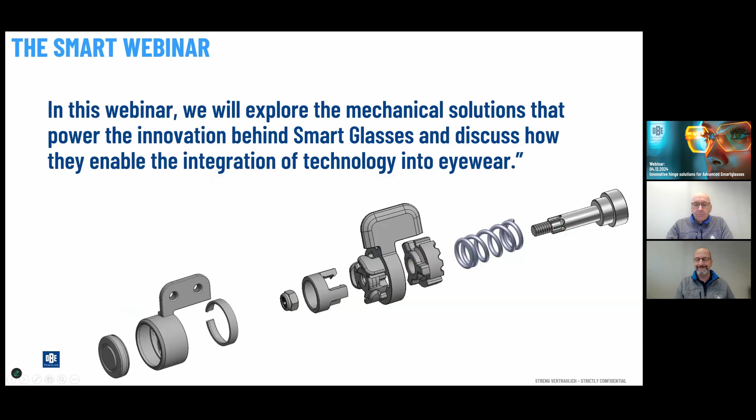So our company was founded in 1904, and we specialized in the optical industry starting in the 1970s. We have been highly innovative, having 200 patents worldwide, and each year we produce about 500 million parts. We have production sites in Germany, where our headquarters is located, as well as in China. This year we acquired a majority stake in an Italian company specialized in luxury frames. By 2025, we will begin operating a new facility in Vietnam. Each year, we equip about 100 million frames with our products and hinges. Since 1996, we have been certified under ISO 9001 and the environmental standard ISO 14001. Additionally, since 2013, we have been active in the smart glass market, offering advanced high-quality solutions.

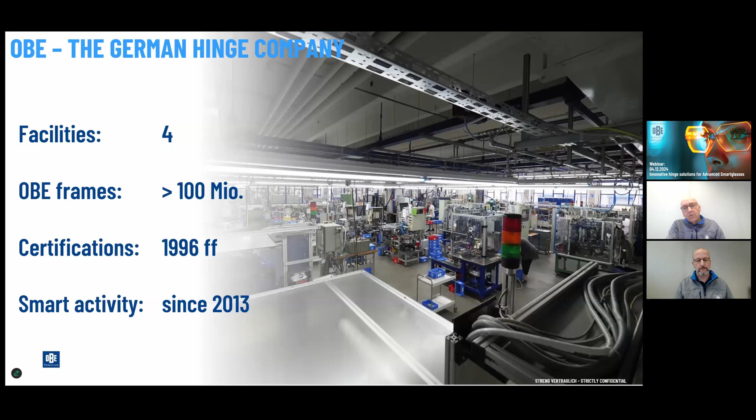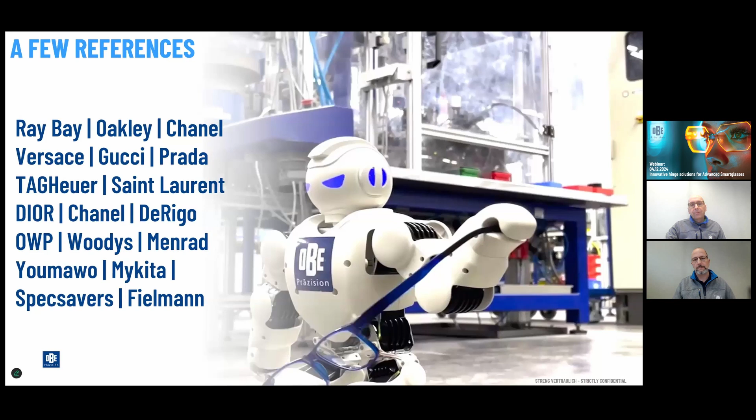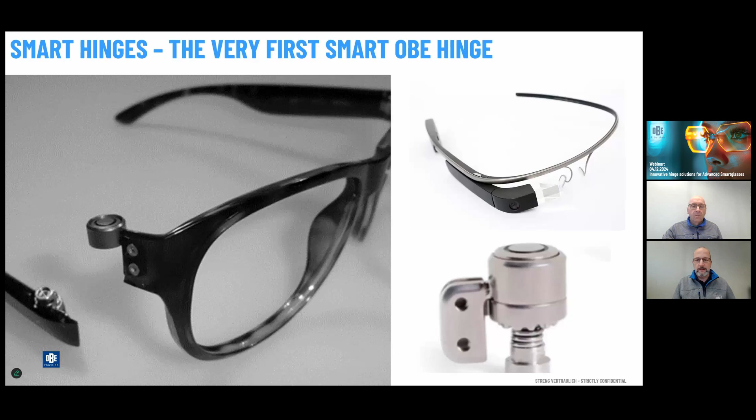This already showed that the smart glasses tend to come more and more to look like standard glasses. Sorry.

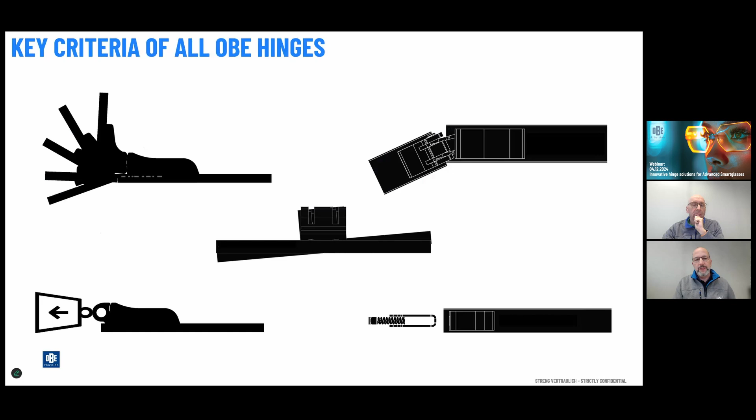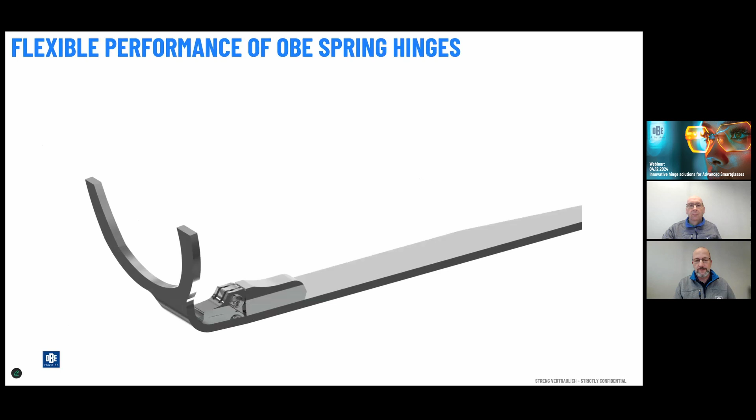OBE's quality is guaranteed by several tests, like cycling test, inclination test, pull-out force testing, and all of these tests, of course, have to be transferred to the smart segment as well. As you can see here, the standard spring hinge movement with 2 stable positions for wearing and storing, as well as the overextension, need to be guaranteed by the QC.

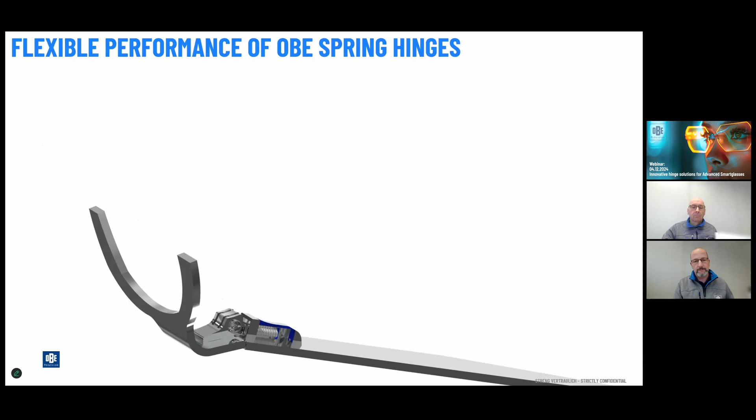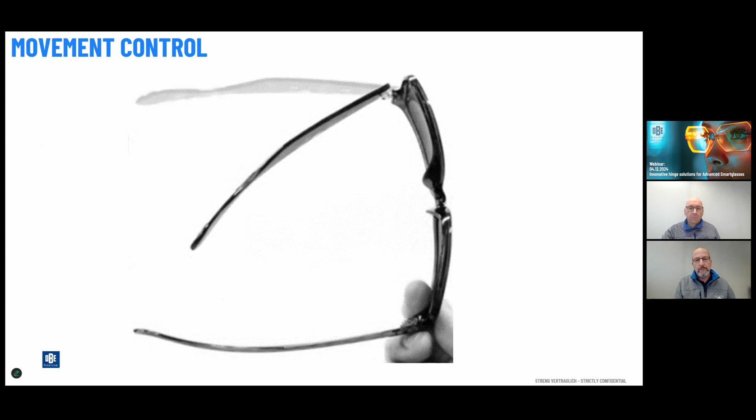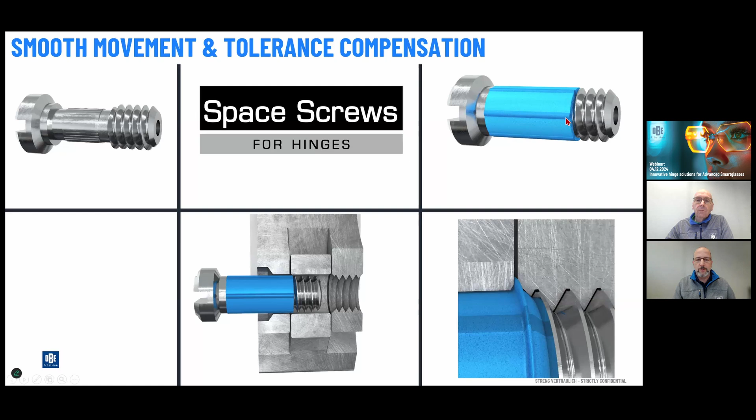If it comes to not having a flex function, but regular hinges, we also have movement control by the use of plastic-coated screws, like these patented space screws, having an overmolding over the screw shaft by plastic, and in addition, 6 small ribs to compensate the tolerances between the hinge lug and the screw shaft.

From niche gadgets to everyday essentials, Frank highlighted our basic criteria for hinges, noting our reputation for spring hinges and precise movement control enabled by our space screws. Building on these fundamentals, I'd like to explore the key factors of smart hinges as they are becoming increasingly more common in our daily lives.

Comfort. The hinges in smart glasses play a crucial role in ensuring overall comfort. They must be flexible enough to minimize the pressure on the wearer's head while simultaneously providing a secure, stable fit. Of course, the weight of the hinge also affects comfort. Lighter hinges can help reduce the overall weight of the frame.

Durability. The second key factor for smart hinges is durability. It is essential that the construction of the hinges matches the frame in order to ensure a long lifespan. In cases of breakages, an exchangeable system helps to replace only the mechanical part, saving the total frame. We believe also that adjustability of the temples to fit the specific wearer will become increasingly important in the smart market. To enable this adjustment, the hinge must be stable to prevent breakage. Additionally, the frame and hinges should be designed for effortless use without being overly rigid.

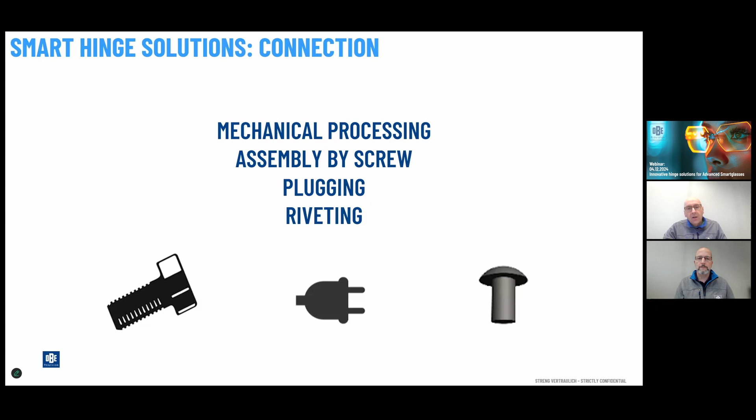Finally, let's turn to our smart solutions, which we differentiate into two categories. The first category mainly involves solutions for the temple, where the electronic device is located on the temple and does not transfer information to the front. For this type of smart eyewear, we offer several solutions.

The second category includes hinges or solutions for smart glasses with a cable feed-through system, where signals, information, or data are transferred from the temple to the front and to the other temple. In this case, the hinge requirements are different, and we also provide tailor-made solutions for these needs.

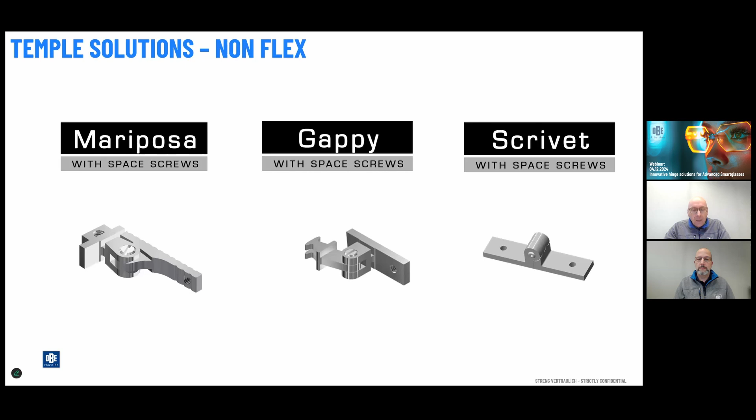Let's come to the first category, pure temple solutions. This picture illustrates the first category of pure temple solutions with no signals to the front. Among our portfolio, we have selected three different hinges with a mechanical connection and non-flexible functioning. These hinges are equipped with a smooth movement system, a space screw system, and are connected using screws and rivets. All of them are made of high quality materials, nickel plated, and come fully assembled as shown.

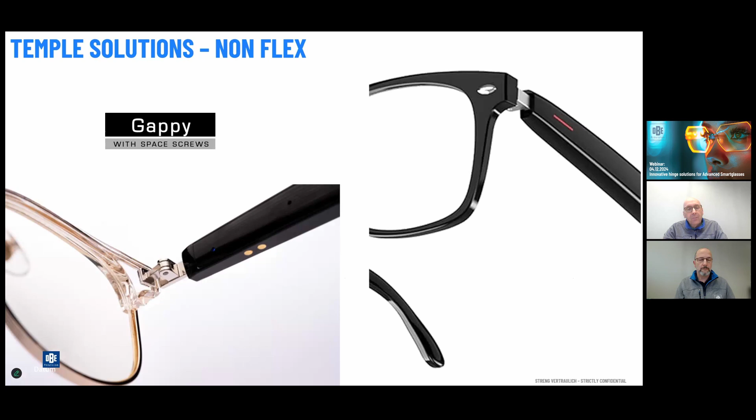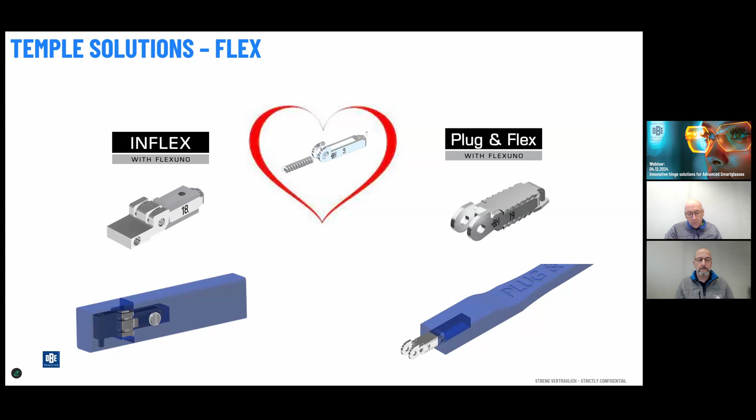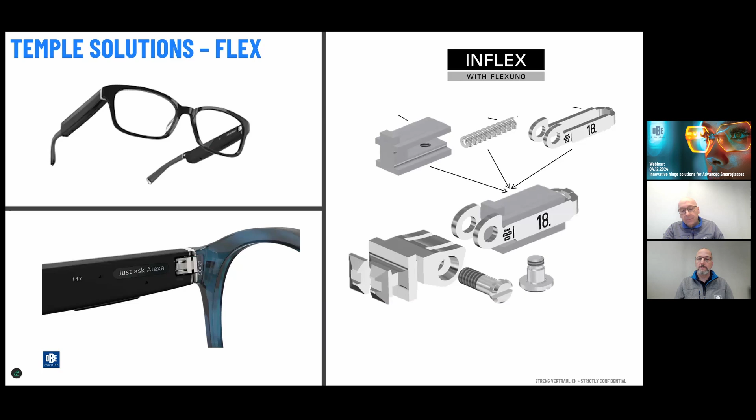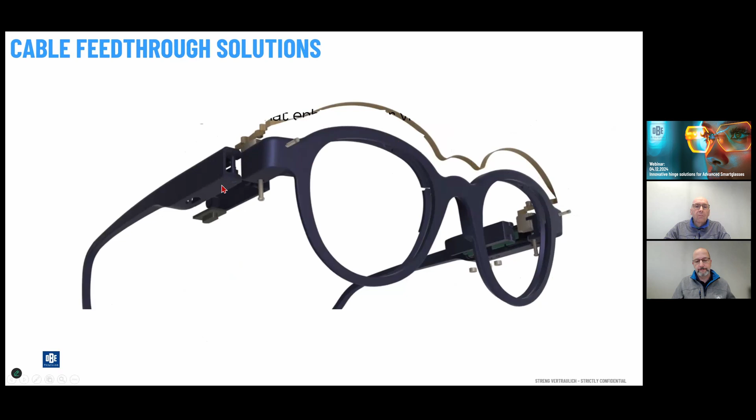But when it comes to data being transferred from the front to the temple, or vice versa, the FPC or the cable has to run through the complete front and especially through the hinge area. This might end up in a problem that the FPC is stressed by several bending operations, which leads to a challenging new topic: to dimension the cable and the cable way perfectly. Either the cable is too long in the open position, so it will be pinched between front and temple, or the cable might be too short, which leads to stress or even a tear when the temple is closed.

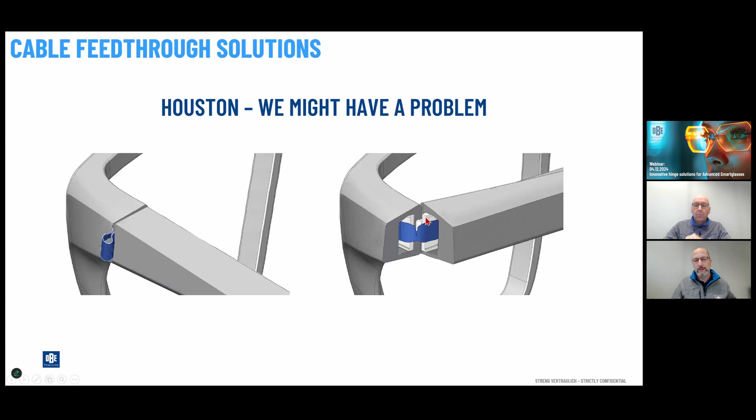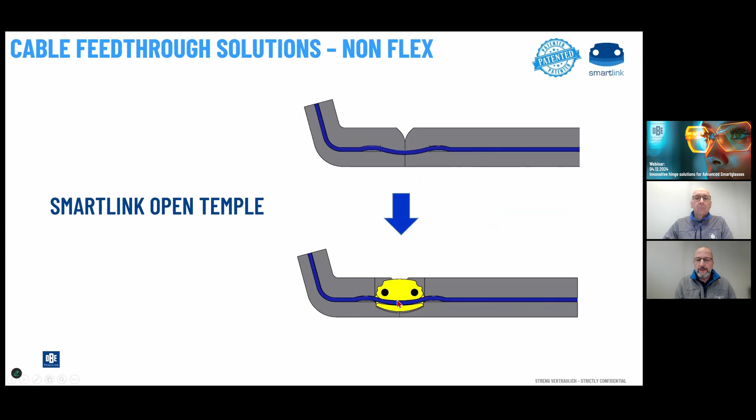For this new task, we provide two different products, one with non-flex operation and one with spring loading, the SmartLink and the SmartFlex. Starting with the SmartLink, the cable is allocated in its track thanks to the slit in the hinge. And the curved construction of this slit prevents the cable from any tangle. Instead of bending the cable in the hinge 90 degrees at once, as usual, thanks to this twice 45-degree bending solution, the cable is not stressed when the temple is folded. The cable is perfectly guided and protected from any accidental contact.

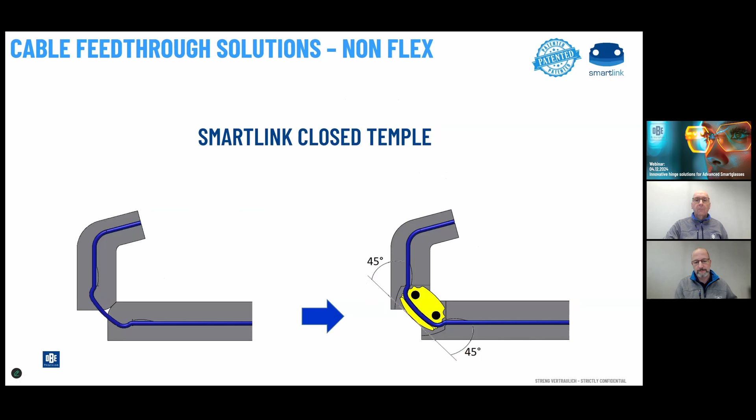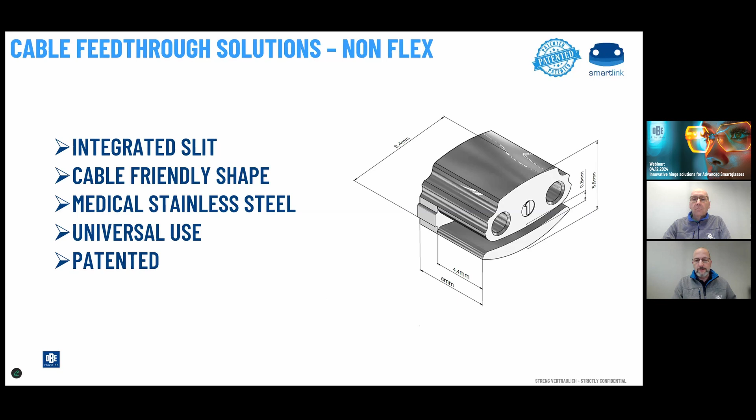So the Smart Link provides an integrated slit suitable for cables up to 4.4 millimeters in width, or FPCs, of course, with the cable-friendly shape. The material is stainless steel, and it's constructed for universal use. And of course, we have a patent on this construction. Another important feature is that due to the open design slit, the FPC or the cable can be easily assembled and disassembled in case of electronic malfunction.

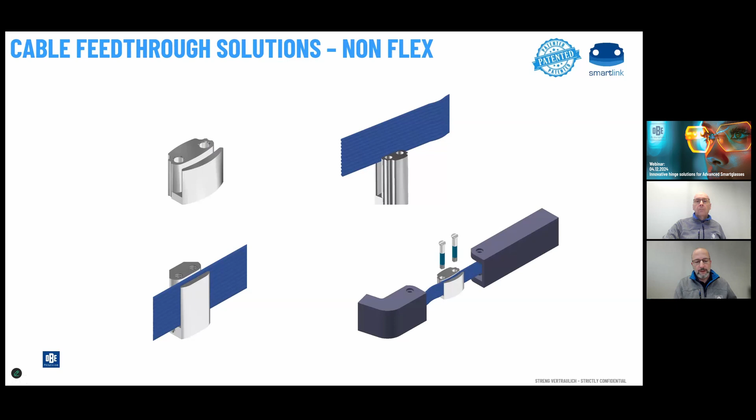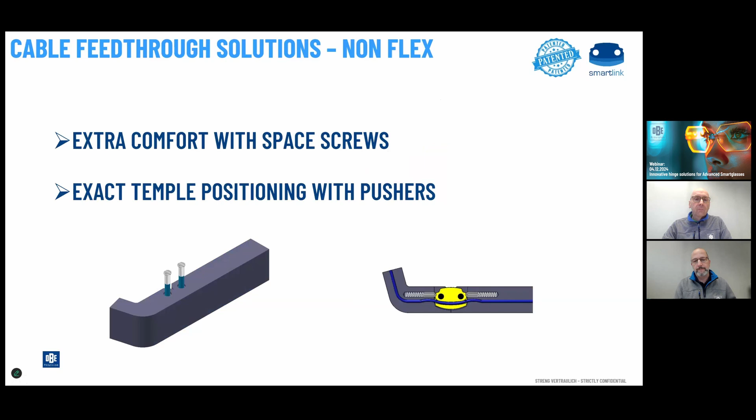In combination with the OBE space screws, the Smart Link provides perfect comfort with a smooth movement. And in addition, with the two spring-loaded pushers, you have a stable opening and storing position. So the Smart Link is a perfect universal solution with cable guidance for less cable stress. It's constructed for easy handling, and it guarantees a smooth movement.

One of our bigger customers, Morrow Eyewear, is using this product. You can see in the pictures the FPC, the cable or the data shown in green, is led through the complete front and through the Smart Link, ending up in the temple where the electronics are located.

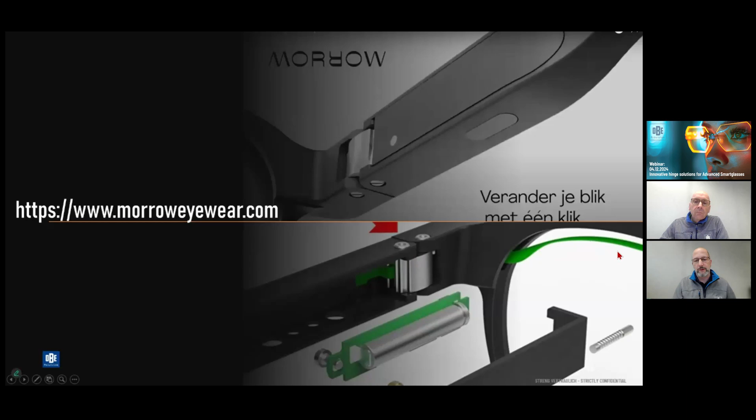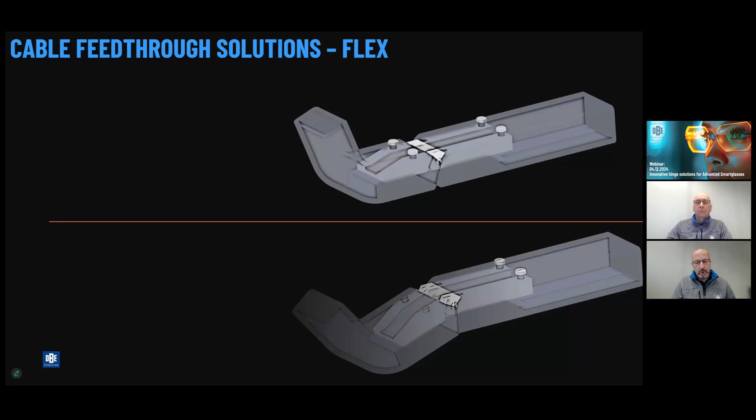If your frame is more rigid, or you want to provide extra comfort, you might consider using the Smart Flex, adding an overbending function compared to the SmartLink, as you can see here. The Smart Flex consists of more components than the SmartLink, of course. We have a housing in the front hinge and two spring-loaded pistons providing stable closing and wearing positions plus the overextension function.

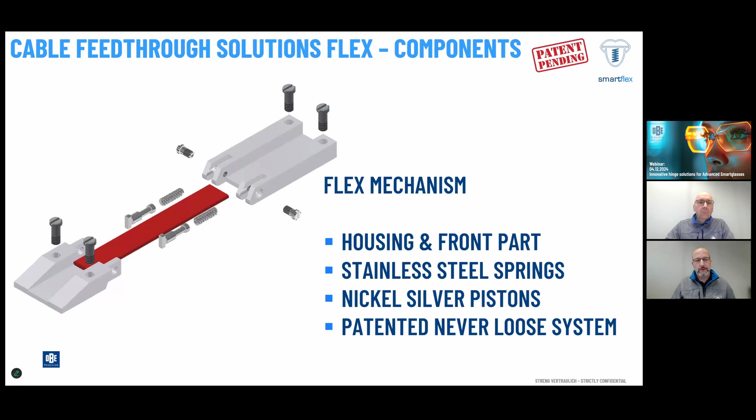Due to this additional spring function, the product, of course, has to be bigger than the SmartLink. Considering the same FPC size of 4.4 millimeters in width, we end up at a total width of 10.4 millimeters. The weight of the complete construction depends on the material used. The standard optical material is nickel silver, which of course is very heavy. So you might as well consider titanium, which is more expensive, or aluminum as a pretty exotic and new material in the optical segment, but saving up to 50% in weight compared to titanium.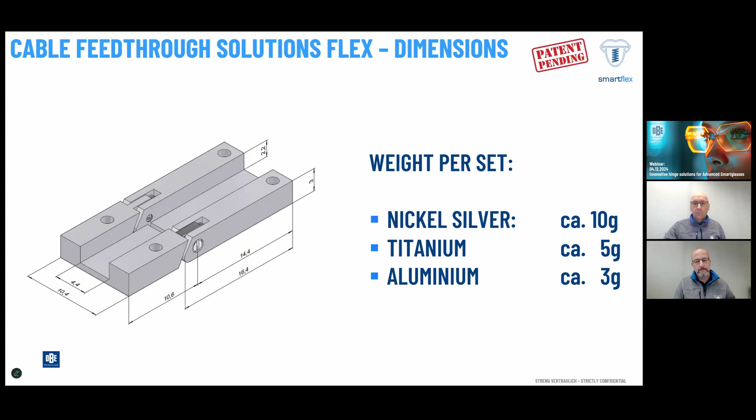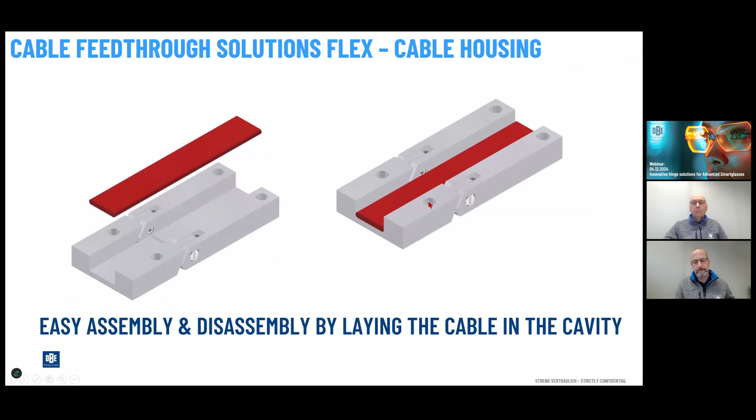As with the SmartLink, the Smart Flex also is equipped with an easy assembly construction for the cable. You can easily insert it into the open cable channel. And the magic behind this solution is to position the cable right inside the neutral fiber, so it won't get any stress by bending. Compared to the outer position marked in red, you can see the elongation of the cable by this red curve. We save this by having the cable led through the neutral fiber.

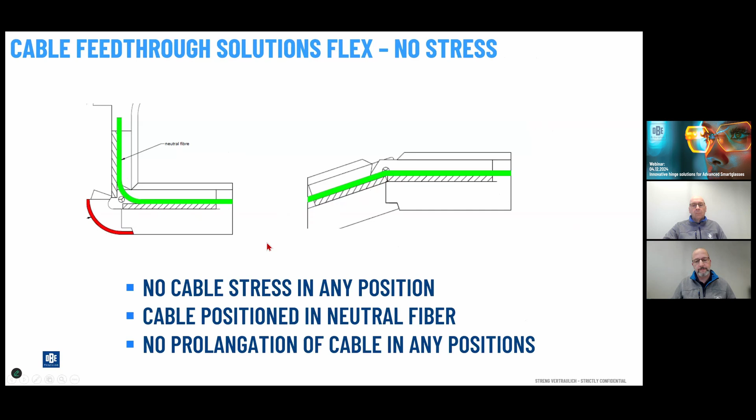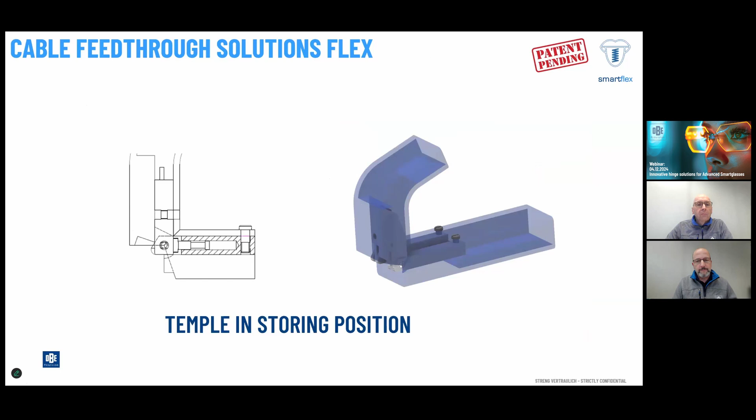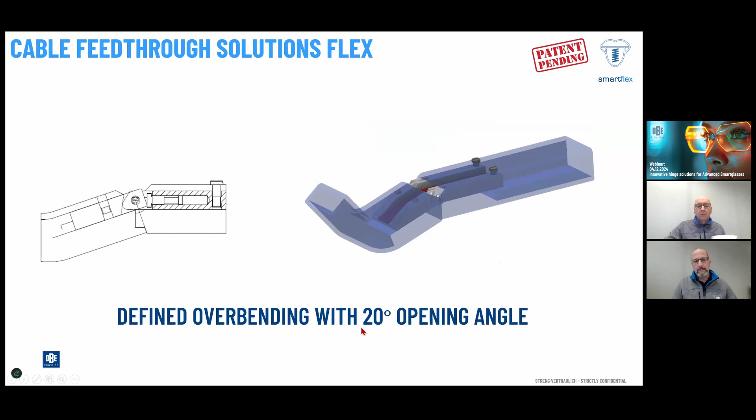These pictures show the stable wearing position, the also stable storing position, and the spring-loaded overbending. To provide as much variability as possible, you can choose the fixing positions of the 4 screws, having them on the inside of the frame, laterally or vertically.

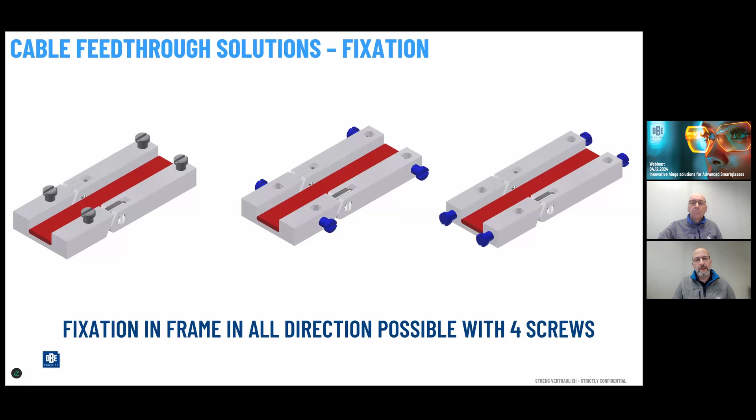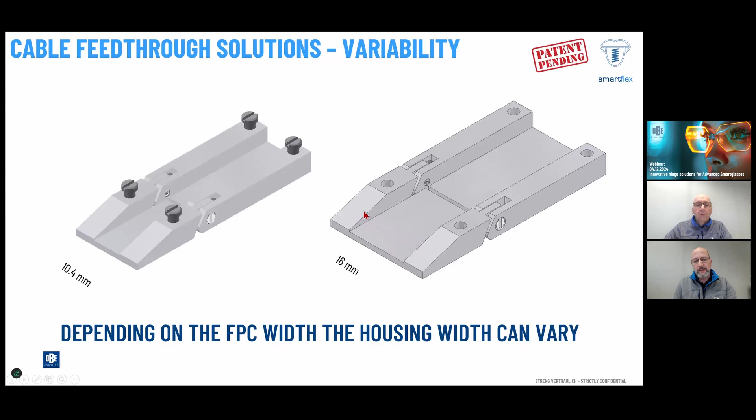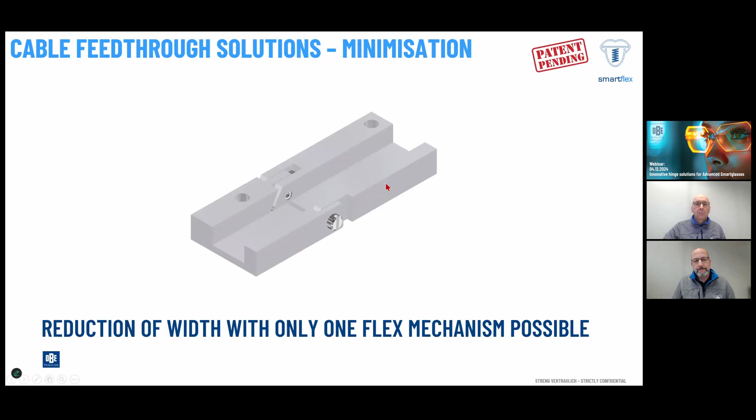If you have special needs for more data to be transferred between temple and front, we can even create a larger version of the Smart Flex. As you can see on the left side, the standard has a 4.4 millimeter FPC channel, ending up at 10.4 millimeters total width. You might also decide to use a 10 millimeter FPC, which ends up at 16 millimeters total width. Or you could go the other way and have as slim a temple as possible. We can even skip one of these spring functions and replace it with a regular hinge to save more in width.

Due to the just mentioned construction, we create a small gap between front and temple, which is necessary for the overbending function. But this can easily be covered by the outer shell of your smart frame construction.

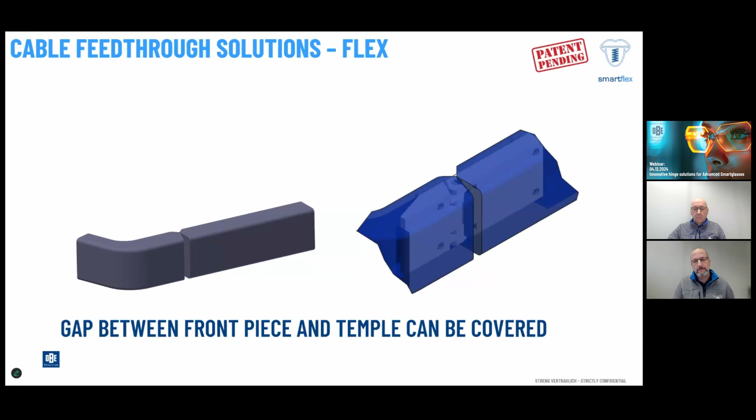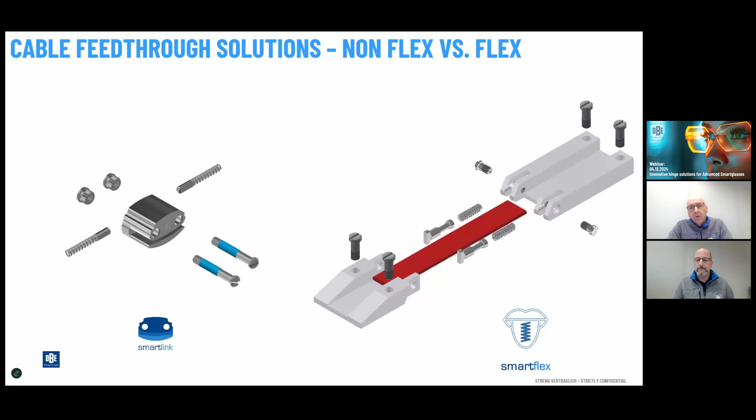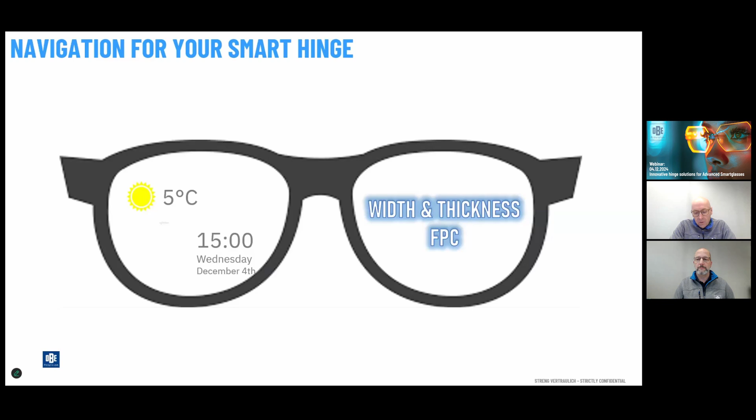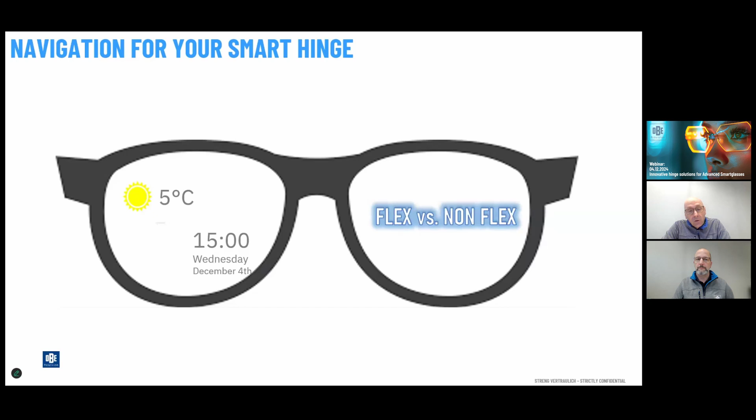So finally, as a summary, we'd like to provide some helpful tips for developing smart glasses and considering the articulation of the hinge. First of all, as was explained in the last slides on the Smart Flex, if a cable is integrated, it is important to account for the width and the thickness of this inner component, as well as its application within the hinge. So consider the FPC or the cable. Secondly, a key question is whether the frame is rigid or flexible, as this determines the choice between a flex or non-flex hinge.

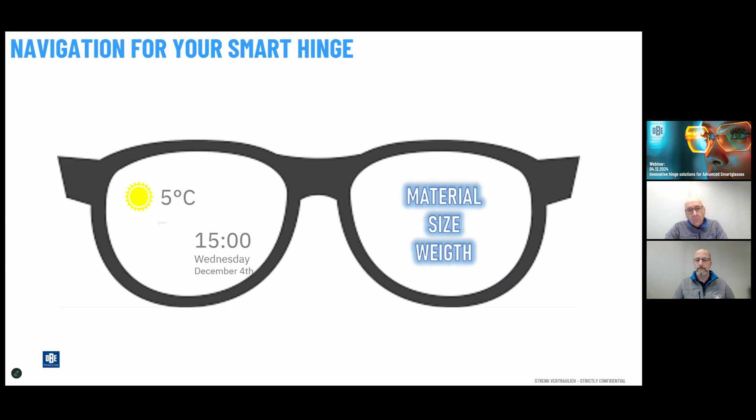Keep in mind that the hinge is available in different materials, each with distinct properties that influence the weight. Additionally, the size of the hinge must be compatible with the frame's construction. Corrosion might be an issue if the hinge comes into contact with aggressive substances. In this case, we offer coatings or non-corrosive materials like stainless steel. Allergies, on the other hand, are occasionally relevant, but are mainly, I would say, a psychological concern, as the hinge itself does not come into direct contact with the wearer's skin.

Other aspects to consider include the method of adjusting the hinge to the wearer. Different hinges have wearing properties that influence the adjustability. Heat resistance or conductivity of the hinge could also be relevant in relation to the electronic device, making the hinge an important factor to consider. In all these aspects, OBE will guide you in finding the best option for the specific application.